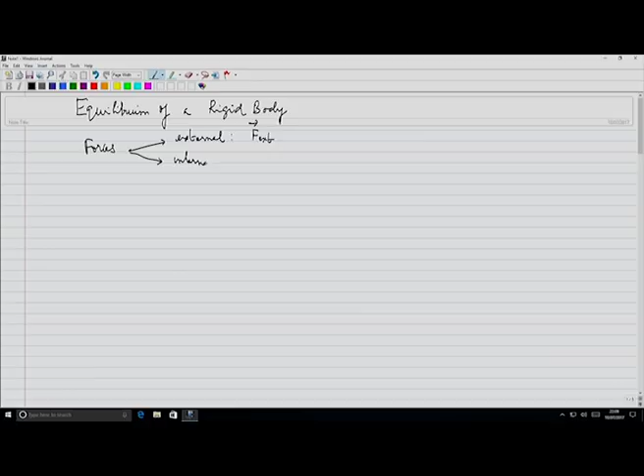Hereafter mostly our focus is going to be on rigid bodies. We had seen that the forces acting on rigid bodies can be divided into two groups: one, external forces, which we generally call F external; or internal forces, which we denote as F internal. We had seen that these internal forces usually do not contribute, either for rotation or for translation.

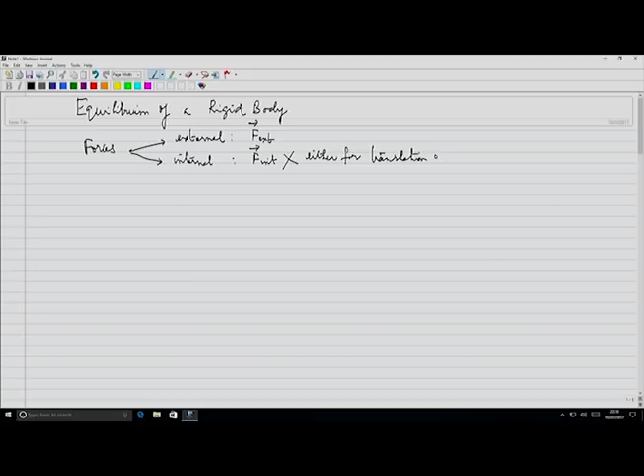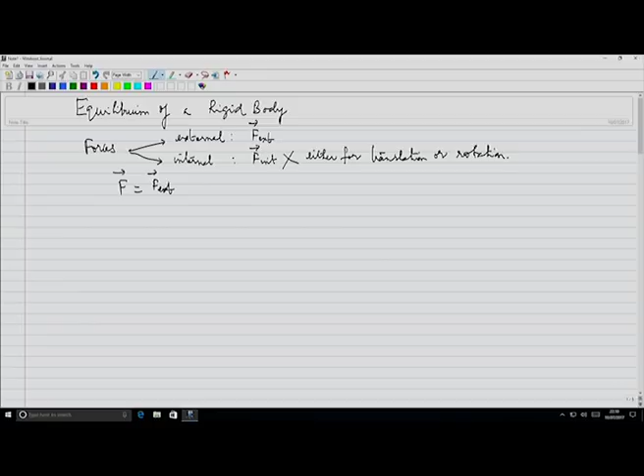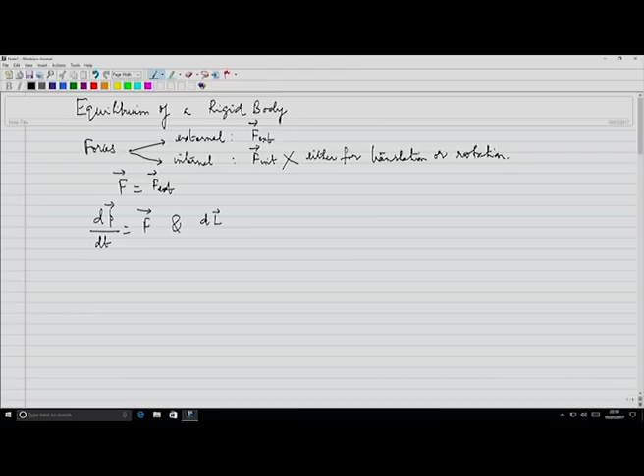So unless otherwise we specify, most of the forces what we are going to consider are external forces, so we will simply denote it by F vector. Now remember, we have dp by dt, rate of change of momentum, is equal to force, and the rate of change of angular momentum is what we call torque, which is responsible for the rotational motion of the object. So whenever a body is subjected to force, there is going to be momentum or acceleration, translational motion is possible, and due to torque you will have the rotational motion.

Now we have the concept of under what conditions the system is in mechanical equilibrium. There are different kinds, a body may be under different kinds of equilibria. There is something else called thermodynamic equilibrium, chemical equilibrium. Right now we are concerned about the concept of mechanical equilibrium. So what is this concept?

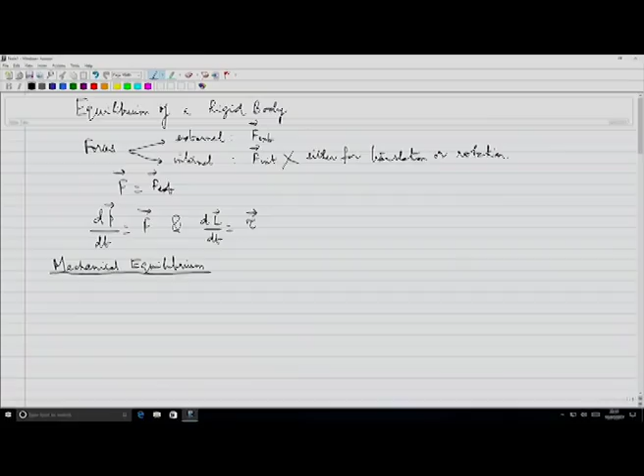This is like this: if linear momentum is a constant of motion, that means linear momentum is conserved, it is not changing. Then in that case what happens? On the other hand, if the angular momentum is a constant of motion, then what can we have? So what happens in this case?

This implies the sum of all the forces acting on the body. There may be several forces. Force is a vector, so sigma over i equals 1 to n, this becomes 0. So for mechanical equilibrium, the sum of all forces acting on the body must be equal to 0. This is what you call translational equilibrium.

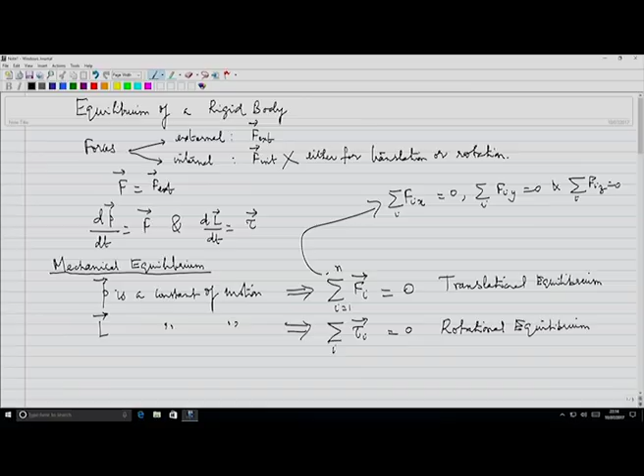So what is the meaning of the first equation? Remember it's a vector equation, therefore the sum of all the x components of all the forces is equal to 0. So if Fi is the ith force, the x component, summed over all the forces, this is equal to 0. Similarly, all the y components is equal to 0, and all the z components is equal to 0. Now torque is also a vector.

Again, sum of all the x components of the torques over all the torques acting is 0, sum of all the y components of torques is equal to 0, and sum of all the z components of torques. Here I am writing these two equations in component notation, therefore there is no need to write vectors. We shouldn't write them.

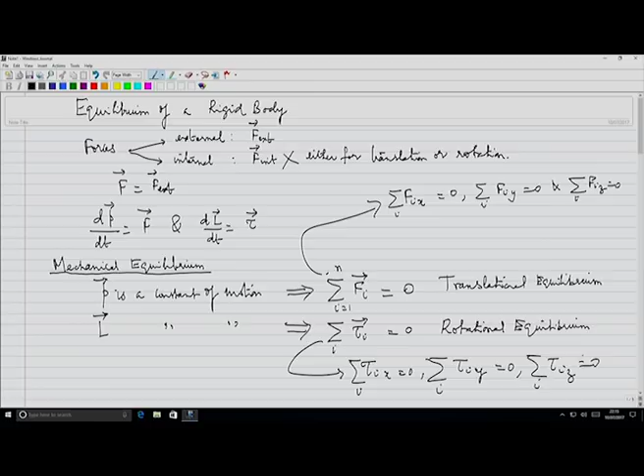Suppose we have coplanar forces, essentially a special situation - for the case of coplanar forces, and let us say that the system is under equilibrium. It is essentially like a two-dimensional problem. Two-dimensional means all the forces are acting on, let us say, the XY plane. And then what happens? For the translational equilibrium, sum of Fi is equal to 0.

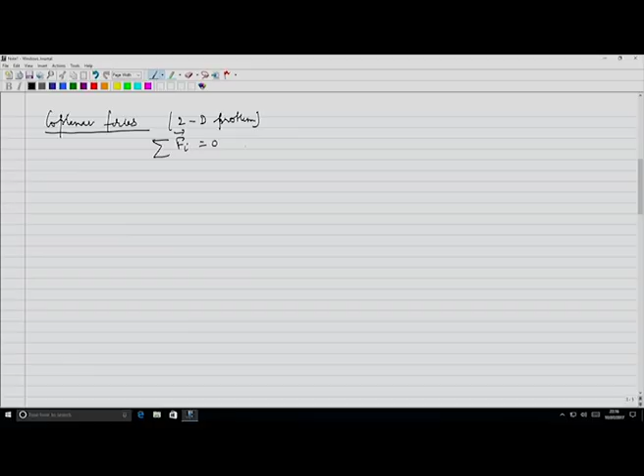This means two conditions: the sum of the x components is equal to 0, and the sum of y components of the forces is equal to 0. So this is essentially two conditions. And you need to look for a direction which is perpendicular to this 2D plane. There is no rotational motion about an axis, therefore there is going to be only tau about an axis.

Tau about an axis perpendicular to F1, F1 and F2 vanishes.

So essentially it is only three conditions, essentially. Okay, right. Now we will...

Now let us consider an important case. Suppose the sum of all the torques acting on this body vanish. You may say that I am going to calculate these torques with respect to some other origin. Is it possible that the body will have rotational motion? The answer is no. We will see how.

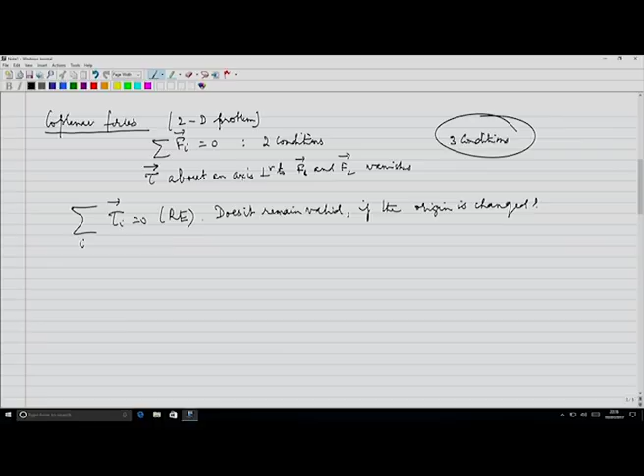You will see, it is a very easy, simple calculation. I have the origin here, and one of the forces, this is A, B, the two points here. Remember, it's a couple acting, minus F, and on this it will be F. Remember, these two have to be parallel, I mean these two lines, but in opposite directions. This is B, I will join this.

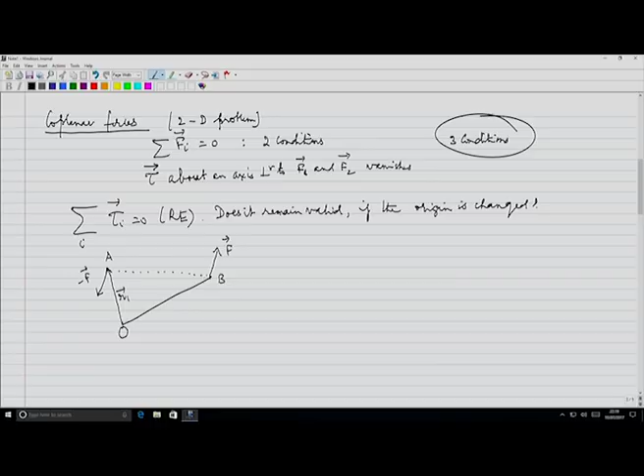This is position vector R1. This OA vector has position vector R1. Similarly OB vector has position vector R2. So these two forces F and minus F constitute a couple on a rigid body.

So now let us calculate the moment of the couple. This couple is, what is the moment of the couple? This is R1 crossed with the force, crossed with minus F1, then plus this R2 crossed with F. Actually here the force is minus F, therefore I should not write this one, simply write minus F, then F. Right? This is nothing but...

This is what will happen here. This is equal to, what is this quantity? This is going to be R2 minus R1 crossed with F. What is R2 minus R1 from this triangle OAB? It will be AB. This is equal to AB cross F.

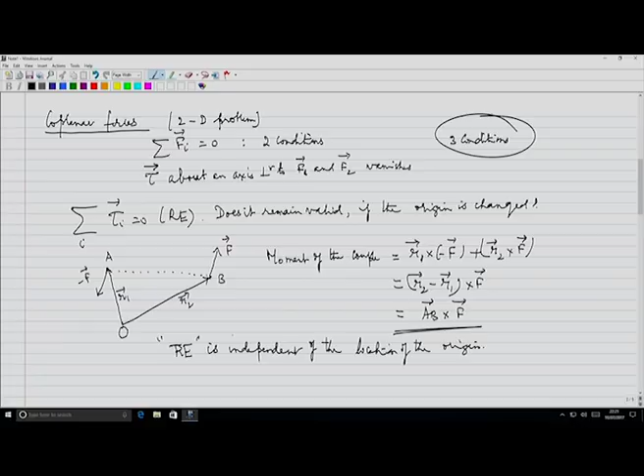So if a body is under rotational equilibrium with respect to a particular coordinate system, and then you change the origin and look at it, it will still remain the same. That is the message. Now we will consider various cases as possible.

The first case is like this. You can treat it as a kind of illustration, explaining the basic concepts. I consider a rod AB. This is A, B here, and you have the center here at C. This is little a, this is little a, the distance. This is a uniform rod of uniform cross section.

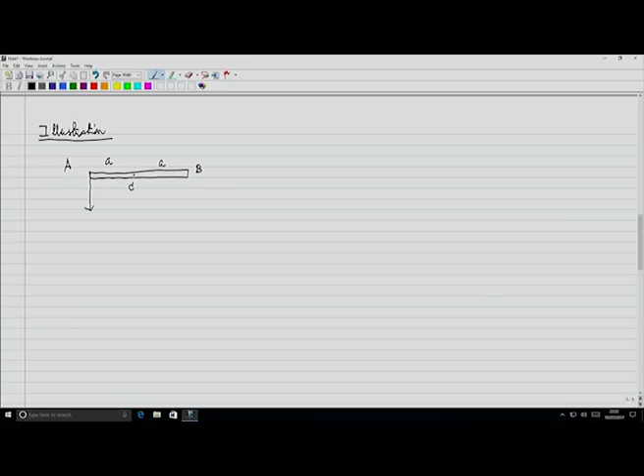Now there is an F acting, and then there is an F acting here. So this particular rod is subjected to two forces, F here, F here. This force will induce a torque in this direction, this is anti-clockwise, this is clockwise. Both of them cancel.

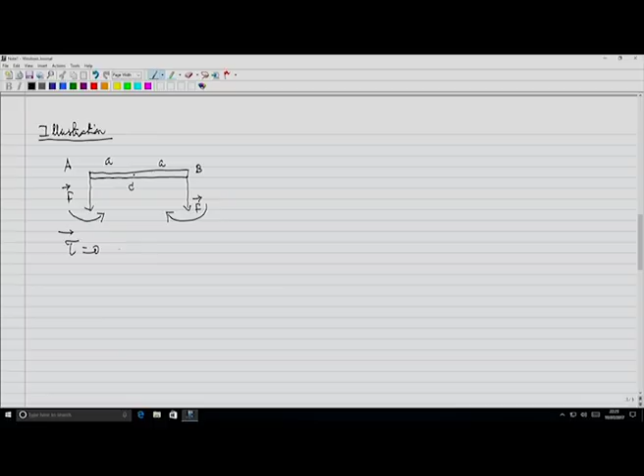Therefore tau is equal to 0. But tau equal to 0 means it is under rotational equilibrium. So it is under rotational equilibrium. And what about sigma of forces? Total forces is equal to F total.

It is not equal to 0. In fact, that is equal to 2F. So obviously what will happen? This is a case where, is it under rotational equilibrium? Yes. What about translational equilibrium? No, it is not under translational equilibrium.

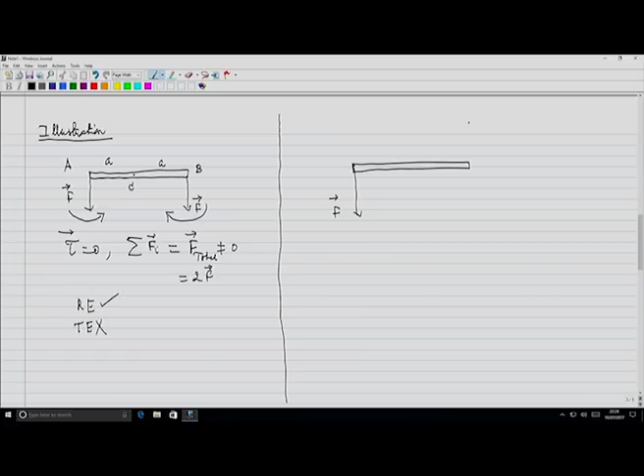Now we will consider the other case. We will consider the same rod, and at this end I have a force acting like this. There is another force acting like this. It's a couple, strictly speaking, that's the definition. Have the center here. Now, only thing I changed, reverse the direction of one of the forces. In this case, what will happen?

Sigma Fi is equal to F total is equal to 0. They are in opposite directions, therefore it vanishes.

However, the sum of torques is equal to torque total. What is the total torque acting on it? So with respect to this, it will have a torque in the anti-clockwise direction. It is 2 times the torque due to each force. So this is not equal to 0.

Therefore, what about translational equilibrium of this system? It is under translational equilibrium. Whereas what about the rotational equilibrium? No, this will rotate. Such a situation where the body does not have translational motion, where it is under translational equilibrium, however it rotates about a particular point and axis, is what is called pure rotation.

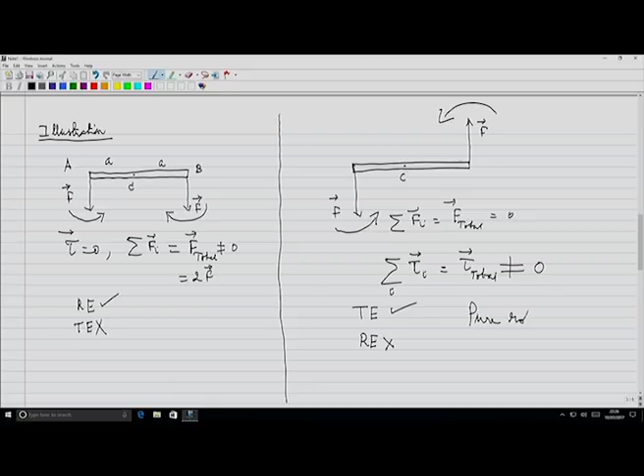We will see one special case. This is what is called the lever problem, a common lever which we use. This is called the principle of moments. Actually, this is taught even at an early stage in school. However, we shall discuss this from the point of view of translational equilibrium and rotational equilibrium.

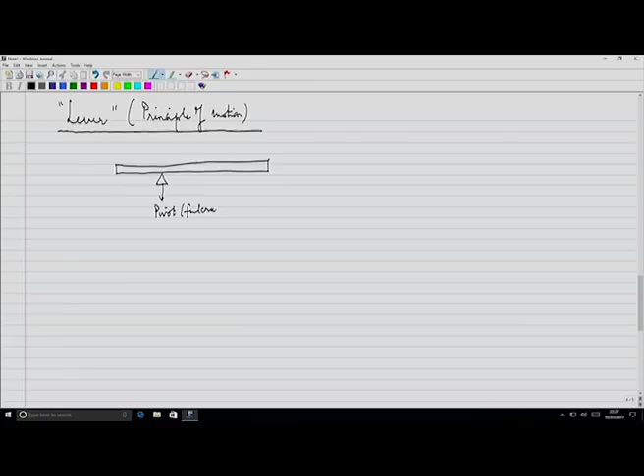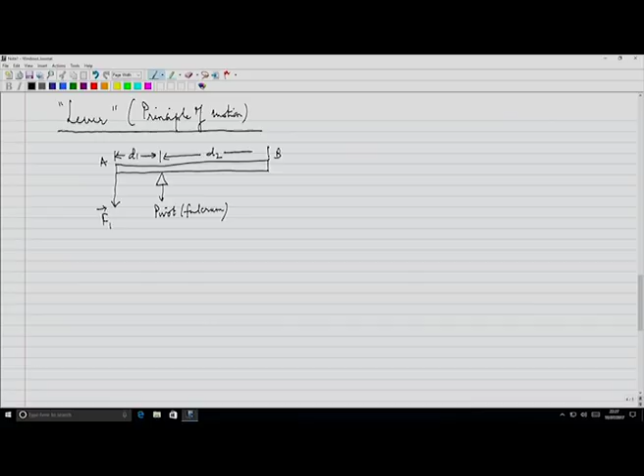So I have a simple lever like this. What you have is a fulcrum, also called a pivot, and here there is a force. This distance is d1, and this distance is d2. Call this point A, call this point B. Now this pivot point you can call O, about this particular point.

Now what happens? This body, this whole rod - ideally a lever should not have any mass, so an ideal lever has negligible mass.

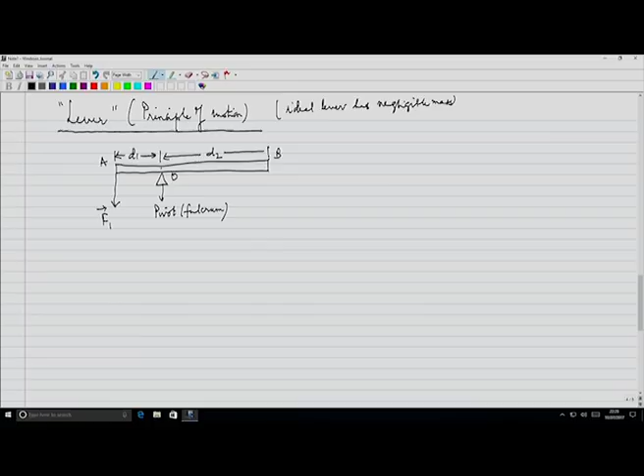There are two forces: one force is acting here, another force F2. It will induce a moment like this.

So generally, this section A to O is known as the load arm, and O to B is known as the effort arm.

There is a weight here which requires to be lifted or moved, and here you apply effort or some force. Now since forces are acting here, there will be a reaction at this particular point - reaction at the fulcrum, reaction of the support at the fulcrum. This is a vector quantity.

So for translational equilibrium, what we need is R must be equal to F1 plus F2.

Now, taking moments - there are three forces acting essentially: F1, F2, and the reaction, which is also of a force variety. Now, taking moments about this particular point O.

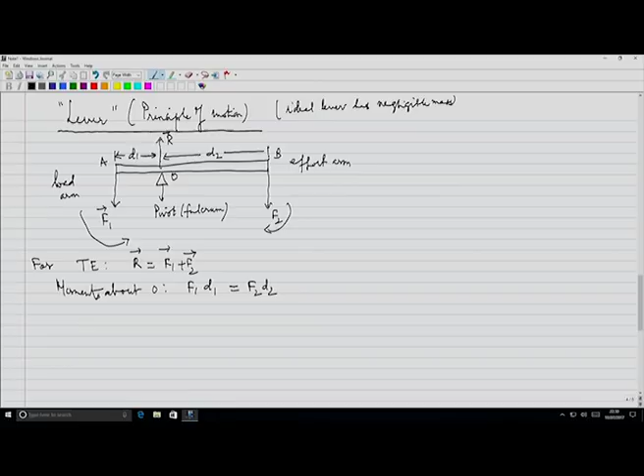The moment due to F1 is F1 into D1, and because this is rotational equilibrium, this must be equal to F2 into D2. So this is for rotational equilibrium, and this is for translational equilibrium.

So this object is not rotating at all, it is in equilibrium. It is neither rotating this way nor that way - both moments are cancelling each other. So from this, F1 by F2 is equal to D2 by D1.

And this is what is known as mechanical advantage. What we ideally want is, if F1 is much larger than F2, then to maintain this equilibrium, we need distance D2 to be much larger, so D1 is much smaller - this is common sense experience.

Now we will go into the concept of center of gravity.

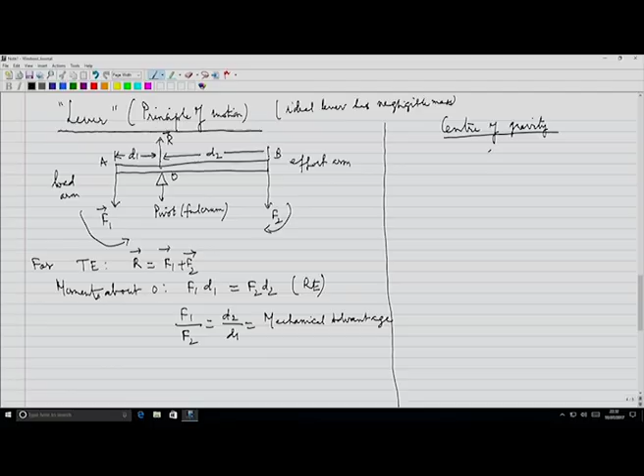The concept of center of gravity. This is a common experience you would have seen. Everybody can do it. If you have a notebook or a cardboard, it can be held on at a particular point, point O, and one can vertically hold it so that this book or cardboard is balanced.

So how does this happen? There is going to be a reaction at the tip, which we call R. This reaction at the tip is going to balance the total weight of the book or material, mg.

So the notebook is under translational equilibrium, and not only that, it's also under rotational equilibrium. Why? Otherwise, if there are different forces acting here, they can tilt like this or tilt like this. It's not happening, so it is not due to unbalanced torque. If there is going to be one, it will tilt. So what happens is...

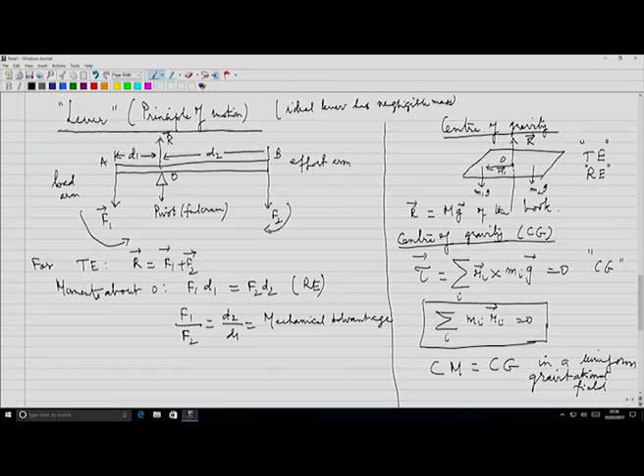Now, on the other hand, if G varies from point to point, then center of mass and center of gravity do not coincide.

Now how is the center of gravity of a body determined? It's again a very standard one. Suppose I have a cardboard or something and I want to find the center of gravity. This is a very standard procedure: what you do is you suspend it from a particular point A.

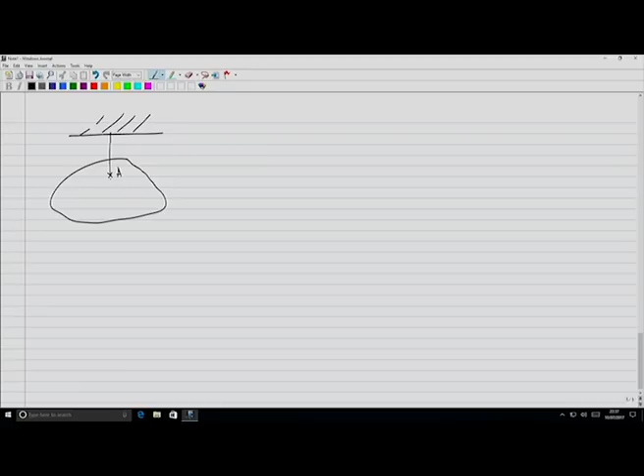Suspend it from a particular point A. This point is A, so the whole weight is going to act along this direction. Now you take some other point B and suspend it again.

Its weight will act along this when you put it this way, when you fix this whole body about point B. Similarly you will find that various lines will intersect. Suppose I have another point C here and do this. So this is the center of gravity — this O is the CG of the body.

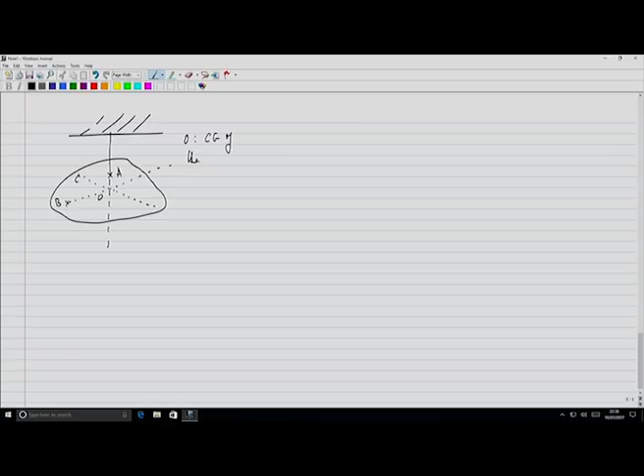We will work out an illustration, a simple problem, and you can treat it as an example covering various concepts which are involved. We will put that — so I have a rod.

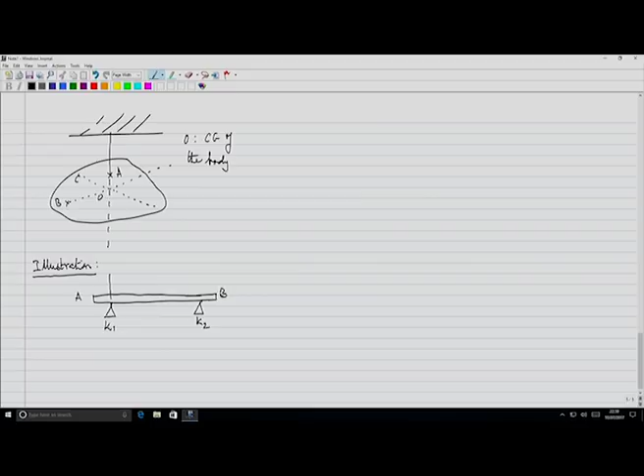This end I will call it as A. This end I will call it as B. So there is a pivot here, K1. There is a pivot here, K2. It's obvious that there will be a reaction here. This is R1, this is R2. So this will I have the CG of the body.

Then I have another weight at this particular point P. Let us say that this is the point P. There is a weight W1. This W1 is given to be 6 times G.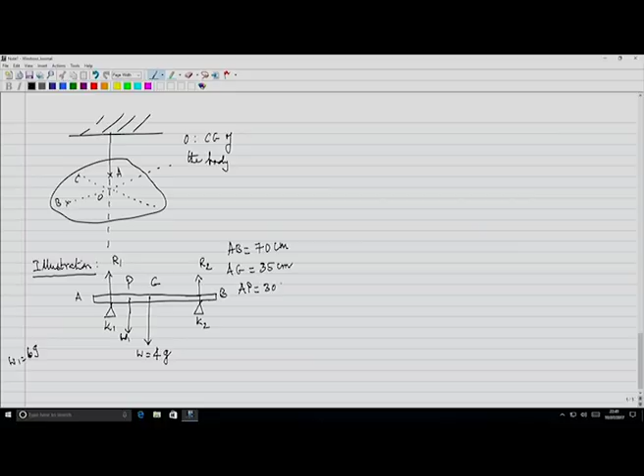Now K1 and K2 are pivots or knife edges, whichever way you want to take. There are a few dimensions given in the problem, I will specify that. AB is 70 centimeters, namely the length of the rod. Then AG, because this is the center of gravity, is 35 centimeters, right? And AP is given to be 30 centimeters. So obviously PG would be 5 centimeters.

Okay, then we need certain distances. What is this AK1? AK1 is equal to, and AK1 is equal to BK2, is the location of knife edges, it's 10 centimeters. So we know what is K1G and K2G. K1G is equal to K2G is equal to, so 35 minus 10 is 25 centimeters. Right.

Now it is under translational equilibrium. Therefore the forces acting upwards, R1 and R2, must be equal to forces acting downwards. So translational equilibrium implies R1 plus R2, the reactions, must be equal to W1 plus W. So we can have this: R1 plus R2 is equal to W1 is 6, W is 4, therefore 10G. Okay, this is one equation. Then I will label it as 1.

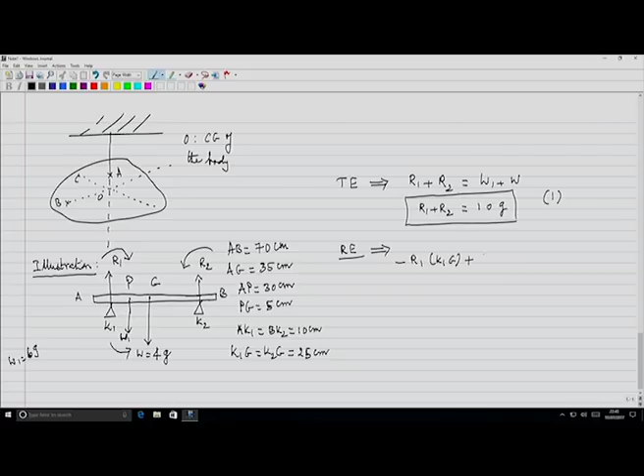So minus R1 into, what is the distance, K1G, plus R2 into K2G. This plus, there is one W1 acting here, W1 into PG. Sum of all the moments is equal to 0.

So we can substitute the numbers. This is 0.25 in meters. K2G is 0.25 meters. PG is just 5 centimeters here, therefore 0.05 meters. From this you will get an equation: R1 minus R2 is equal to 1.2 G. Strictly speaking, I should put, if I want to write the units, I should write newtons here.

Some little bit of arithmetic is involved, do it. Now from these two equations, you can calculate R1 and R2. R1 is equal to, if you add these two equations, 2R1 you will get, from the 2R1 is equal to 11.2, then R1 would be 54.88 newtons and R2 is equal to 43.12 newtons. Right? So it is very easy to do these kind of problems.

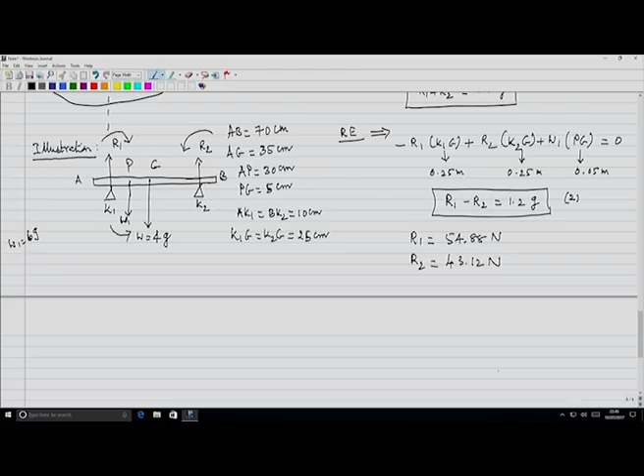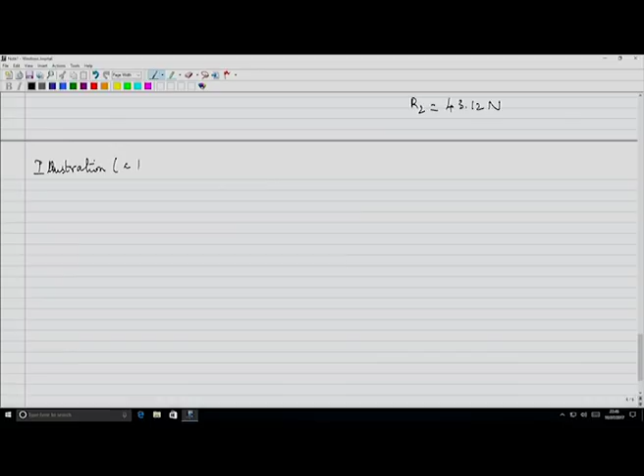And now we will consider an illustration, another problem. But there are different kinds of problems that are involved which are repeatedly asked in examination. Various things can be asked. One is a ladder problem. This I will call it as an illustration or a problem. You can treat it as a problem or example. This is what ladder problem.

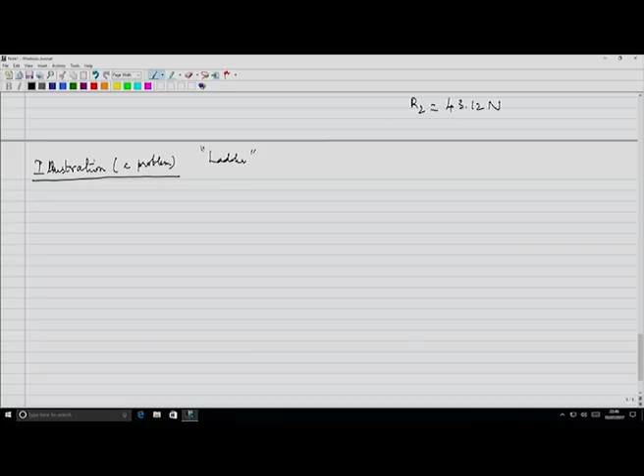Ladder right now, so the situation is like this. I have a wall. I have a ladder here. This is a ladder, ladder is AB. The wall is smooth, whereas the floor is rough. I can have this also rough, this also smooth. We will do this. So this point I will call it as D. This is C. Call this point as C.

So the weight will act downwards, M into G. And now, what are the various forces acting? That's what first we should sketch very clearly, indicate very clearly, then indicate the directions of torques also very clearly.

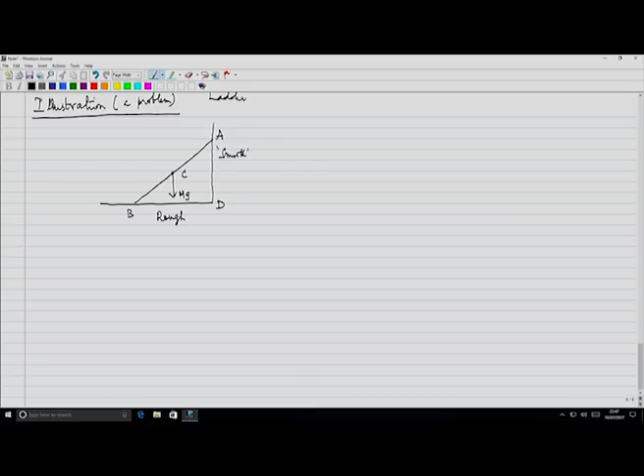Now, because the wall is smooth, there is going to be a reaction here. This I will call it as N2. I need to have a little longer one for reasons you will realize why. This is N2. Then, because it is rough here, what happens is, you have here a frictional force F, and this is what is going to be the normal reaction of the floor on the foot of the ladder. Now, these two forces can be combined into one. I mean, I am not indicating it very clearly.

So, this particular one is going to be the F. Sorry, I need to do it. This is F.

Now for equilibrium, when I produce this, when this force is produced, they must meet at a particular point, not a bad diagram, and this point I will call O. Why should they meet there? What happens if they don't meet? Because if they meet, all the torques about this particular point will be zero. Therefore it will be under rotational equilibrium.

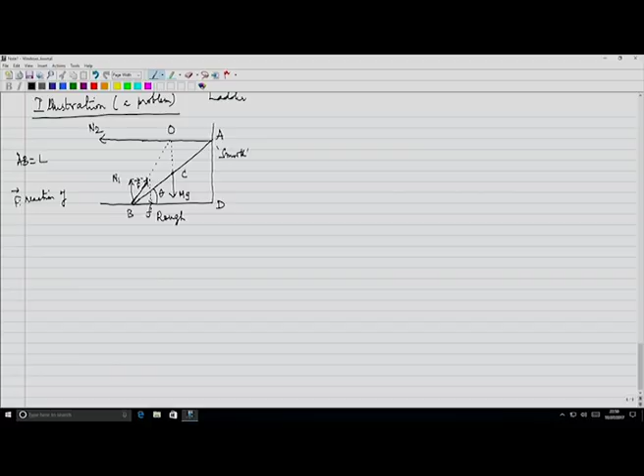So what is F, sir? Actually F is nothing but the reaction of the floor on the foot of the ladder.

Okay, now let us work out. It is under translational equilibrium and also under rotational equilibrium. So translational equilibrium implies sigma of all the forces is equal to 0.

What are the forces acting, sir? We can have two kinds of forces, one along horizontal direction, one along vertical direction. Therefore we will have two equations: sum of all Fy is equal to 0, and F of x is equal to 0, implies there are only two forces along the horizontal direction.

N2 is one force, it is acting at A. There is another force, the frictional force F, acting at B. Therefore F is equal to N2.

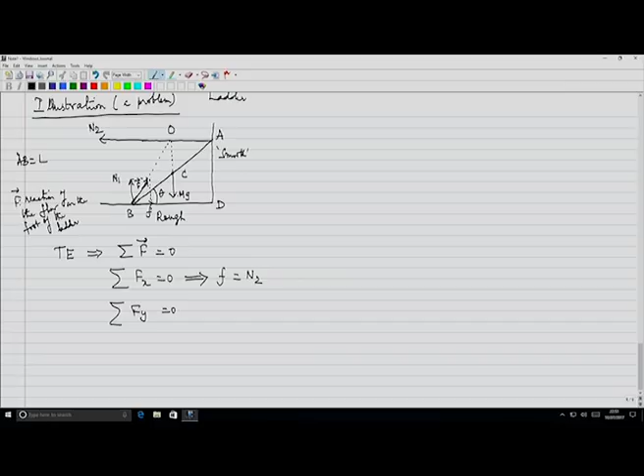What about the forces acting along Y direction? Only two: one is the weight of the ladder acting at the center of gravity, and the reaction at this particular point. This implies N1 is equal to mg.

Two important equations we have got. All that we have done is make use of translational equilibrium, nothing more. Now, rotational equilibrium.

So sum of all the torques, this must be equal to zero. About which point would I like to calculate? I would like to calculate net torques about B. You can choose any point you want, we've seen this earlier.

And then what will happen? The weight of the body will rotate in the clockwise direction, whereas N2 will rotate it in the counterclockwise, anti-clockwise direction. So mg into...

The foot of the perpendicular from this particular point, that will be equal to what? This length will be L by 2, this whole length is L by 2, this is L by 2 into cos theta, minus...

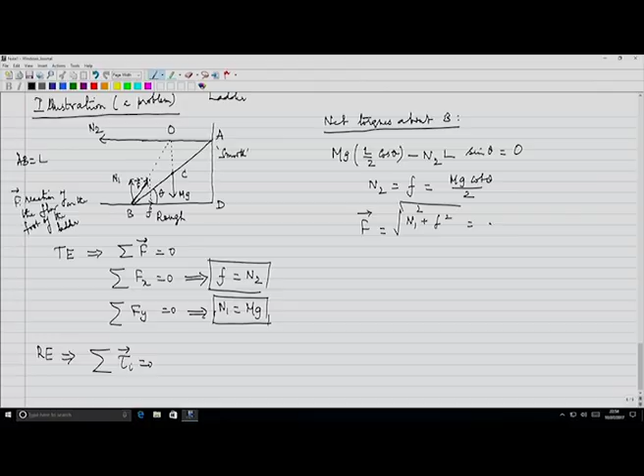This will be equal to square root of, as from this particular figure, I have here N1 squared plus F squared. This is same as square root of N1 squared plus N2 squared. This is equal to, N1 squared is mg squared, 1 plus cot square theta by 4.

So this is nothing but mg into square root of 4 plus cot square theta, divided by 2. This is the magnitude of the force.

You can also do a little bit of calculation to find what is the direction of the force. The direction of the force is given by what? Suppose this is going to meet at this particular point, I need to give some name. So the direction of the force, the direction of the reaction of the floor, reaction R, is given by this angle OBE.

That can also be calculated from a little bit of geometry. Now we will consider one more example.

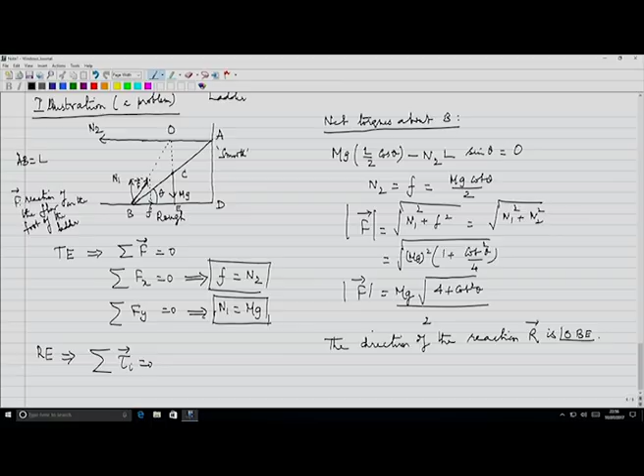Now this is again one of the typical problems: the ladder problem. Another typical problem is what we call keeping a heavy block on an inclined plane. This kind of problem is called inclined plane. We will call it inclined plane, and I would call it block or blocks placed on an inclined plane.

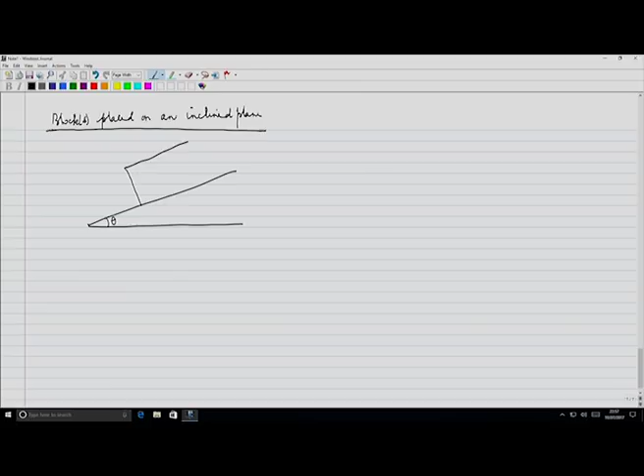This is another typical problem. I'm not going to write down the problem, but I will describe the physics of it. Physics of it is like this: I have an inclined plane, this is theta, and I have a block placed on it. H is the height of the block, and the length of the block or a side of the block is B.

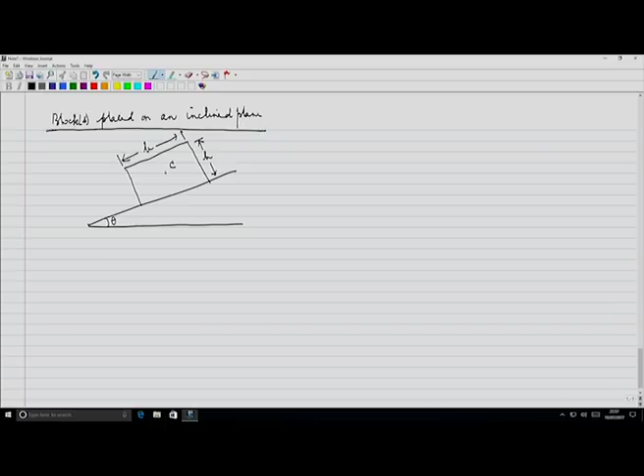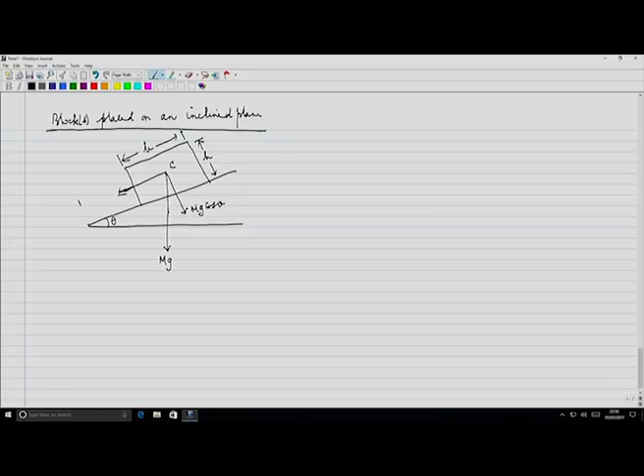The weight will act through the center of gravity. This will be mg. This can be resolved along two directions: this is mg cos theta, and this will be mg sin theta, that is mg into sin theta.

Now suppose this inclined plane can be rotated about this point. Then this top portion will coincide like this, and the block is placed on it. I can rotate the inclined plane, meaning the angle theta can be increased. When the block is on the floor, mg acts downwards, and the normal reaction also acts here.

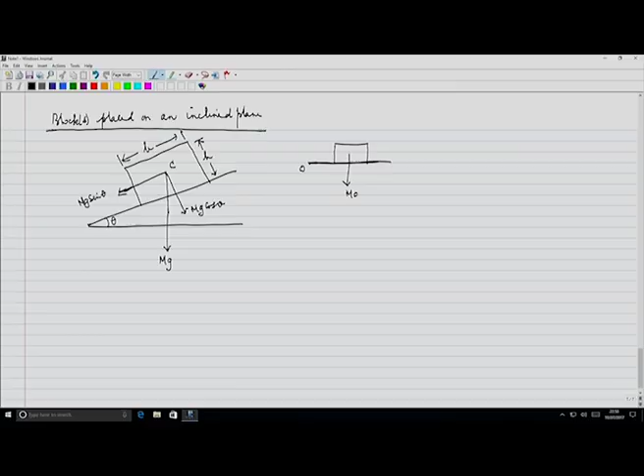Now if I keep rotating, what will happen? At a certain point there is a situation when this block can topple. When the block topples, this normal reaction will no longer act through the center of the CG, so the normal reaction will be at some other point. This is going to be the direction of normal.

As you keep rotating, when you reach a particular point, this n will move. This distance we will call x. The point of application of n will shift from this line towards this side, and the body will topple when n exactly coincides with this particular side.

This kind of problem can be done. I will call this point A and this point B. That's all I would need. Now, the block has two tendencies: one, the block can slide down, which is translational motion. The block can slide down.